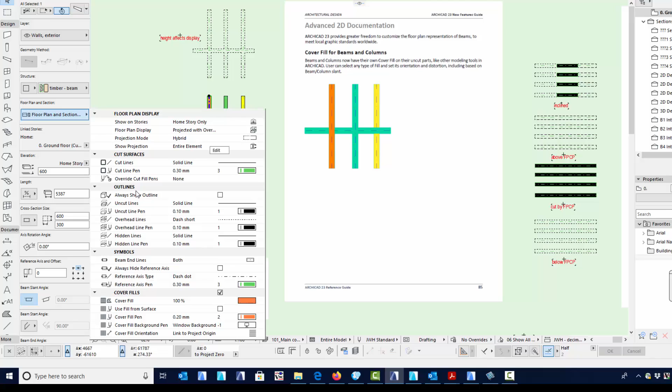The fill is adjustable, so if I select this beam here and go into the settings here, you can see there's a new section here for cover fill, and you can choose whichever fill type you like, whatever pen colours that you want, and they will blend automatically, as in if you look at these in 3D, this set of beams, all of these beams are at the same level, so they're all the same height, position, size in 3D, but each beam can have its own separate cover fills.

If the cover fills are the same, they blend together. If not, one will dominate the other, and that's simply controlled by the display order. So I can send this beam to the back and it will now be behind the green beam. So you can send beams forward and backwards if they're all the same level.

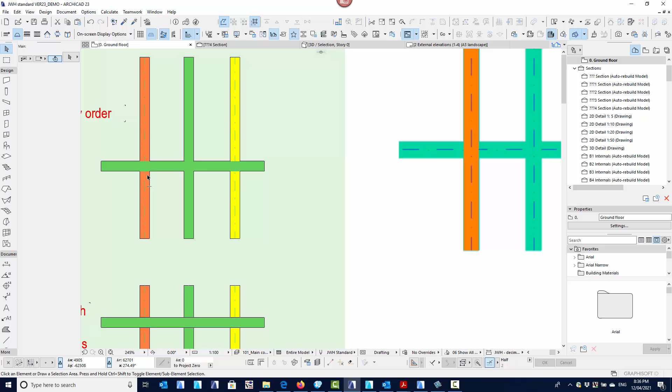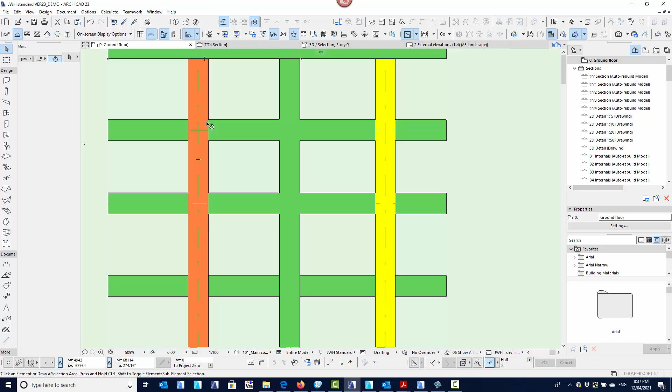If they're at different levels, like this one here, so this beam along the back here is above all of the other beams, this beam along the front is below all of the other beams, and then these ones in the middle are staggered half above, half below. You can see that if the beams don't touch, you'll get solid lines where the beams don't clash with each other. Where the beams actually do touch each other, the lines will be missing, but you won't see, for instance, like this beam here is above the other beam, you won't actually see that line, and the display order will not change the effect of that line.

So I can bring this forward in display order. It will now change the fill so that it's above this one, but there is no physical line there, unfortunately. The only time, as I say, you get a line is when the beams physically do not touch each other, and then you'll see that as soon as two beams touch each other in 3D, the edge lines, the contour lines will disappear, regardless of whether one beam is above the other or not. But you can still use display order to bring different fills forward.

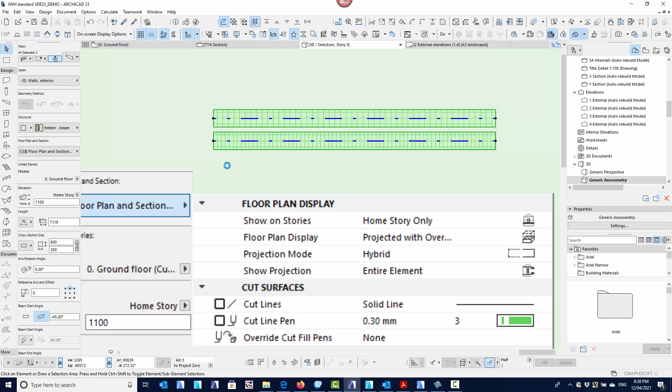Another thing you can do with the fill is they've got a section for the cover fill that's called 3D distortion. So in the case of this, I've got two beams, which if I can show you in 3D, one beam is horizontal, the other beam is sloping. So you can see exactly what's happening here. If you look at them from a top-down view, you'll see that it's got the same fill pattern on the top surface as this beam here, but because it's sloping, the fill pattern seems to be condensed.

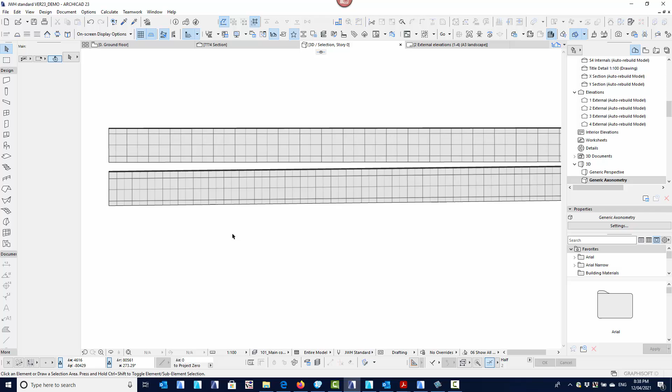And that's exactly what happens in plan when you use this 3D distortion. The fill pattern will basically be condensed. It distorts with the inclination of the beam. Not a big thing, just something that you might make use of when you're modelling beams. You now have the cover fill, which we never had before.

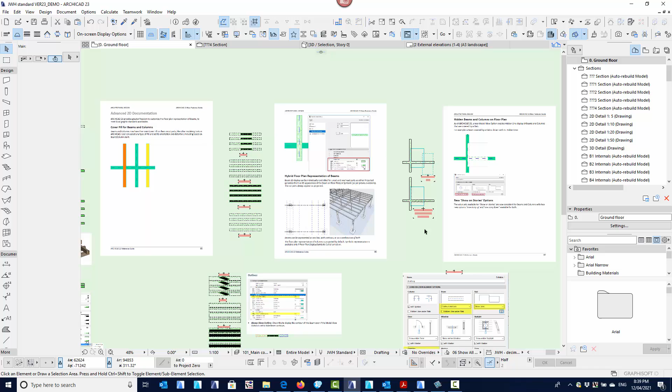Another thing you can do with beams is there's a new model view option. So if I go into model view options for the beam, the section for beams, so in the construction element options for the beams, we still have this, it used to be called entire beam before, it's now just called contour and axis. So we can have both the outside contour line and the axis line. We can have the axis line only, or we can have the contour line only. So you can see, as I flick through these, you'll see the difference in the beam. So contour lines, axis, or contour and axis.

There's a new option that says here hidden line under slab. So what that means is if this beam actually goes below a slab, it will become a hidden line. If I turn that off, you see it's just a regular beam, but as soon as I turn that on, if there's a slab above this beam, then the portion of the beam that is below the slab will become a hidden line type. And you can see that here.

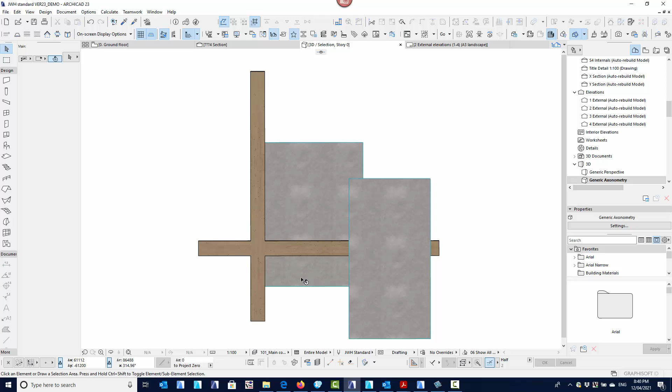Now, it doesn't affect slabs on different stories. So if you look at this here, if I show you this in 3D, I'll zoom to extents, what I've got here is a slab below the beams, a slab above the beam, but this slab is in the story above.

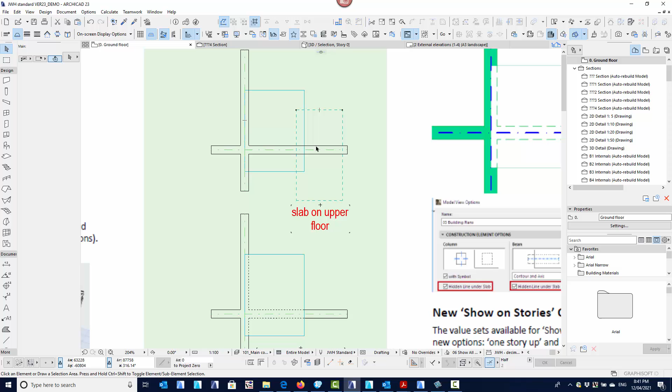So when I go to my floor plan, you can see that these beams are above this slab, so I expect to see the beams as solid, which I'm seeing here. This slab is above the beams, but you can see it's not affecting the beam lines because it's in a different story. Whereas

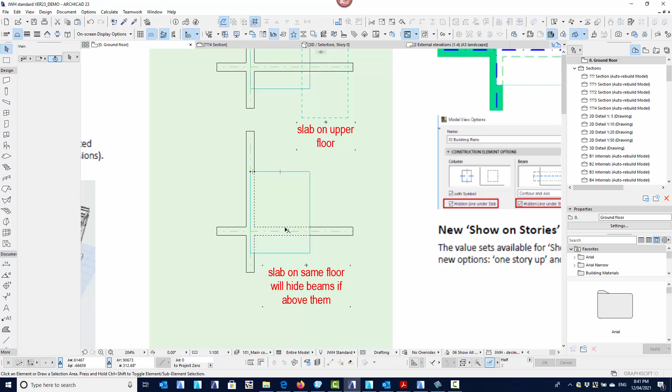if the slab is in the same story, so if I look at this in 3D, you can see that this slab is sitting above the two beams there. Because that's above the two beams and I've got that option turned on in the model view options, this part of the beam is now hidden.

And it's completely live, so if I move this slab across, you can see it automatically trims and hides. So it's completely live, but the trick is the slab and the beam have to be in the same story for that to work. There is a completely new tool called the opening tool.

It is quite similar to an empty door or window opening. It does basically the same thing. It cuts a hole in the wall. But the great thing about it is it can be associated to multiple elements at the same time. It can also be associated to different elements. So not only can we cut walls, but we can also cut beams, slabs, meshes.

It doesn't cut everything, so it won't cut a column, it won't cut a roof, and it won't cut a morph. But effectively, what it does is, as I say, similar to a door or window opening, in that we can assign an opening to an element and it can pass through multiple elements at the same time.

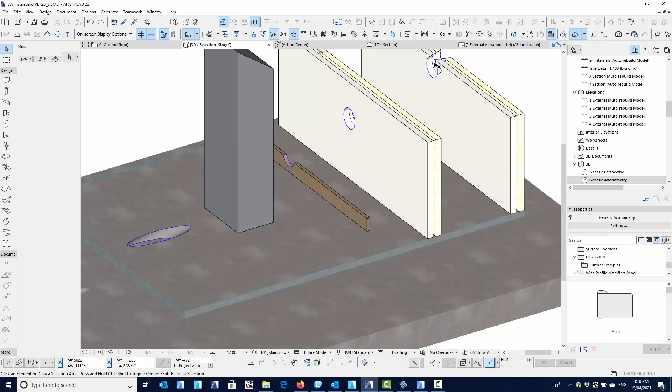So you can see here it's passing through this wall, going through this wall, cutting through the beam. It won't unfortunately cut a column, and it's then going through the slab and it's going through the mesh. There's an option up here in your on-screen display options to show the opening cutting bodies, and you can see an image of where that cutting body is. So it's a combination between an opening and a solid element operation.

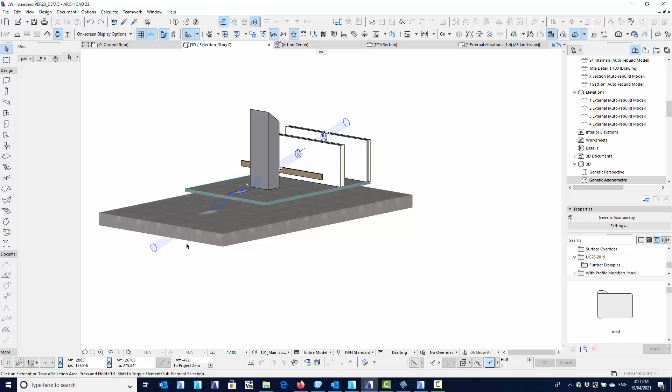So the opening belongs to one of these elements. In this case, I think it belongs to the slab, but I can then associate it to multiple elements that it will cut through. It can be repositioned, it can be rotated, it can be changed in size, and it will adjust accordingly if it's cutting something.

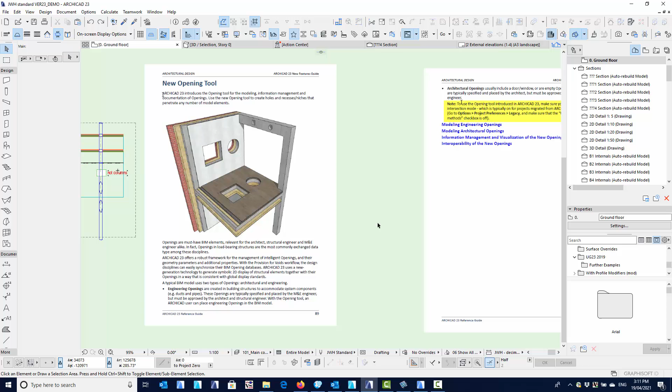It can only be round or rectangular, so you cannot have polygon shaped openings at this stage. Round or rectangular and oval, and you'll see some further settings as I explain it. I won't explain all the details of it, just go through it briefly, but that's the sort of thing that it can do. It can be a full opening through, it can be just a little niche, so you can actually control the depth of the opening as well as the size of it, so it's quite good.

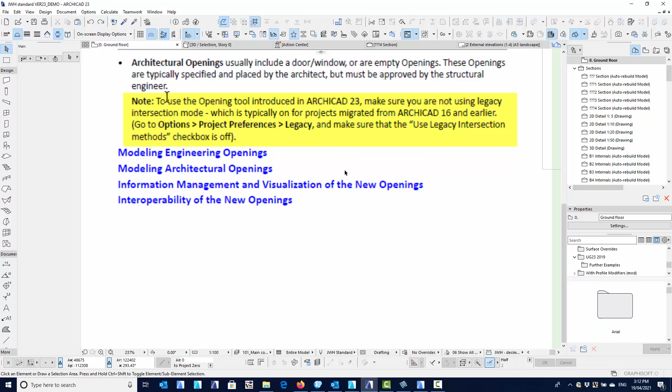The thing to watch is that, as it says here, make sure you're not using legacy mode, which we shouldn't be using any legacy modes, but any of the old jobs from pre-version 16, if they're set to use legacy options, the opening won't work at all because it's not designed to work in anything that's using legacy mode.

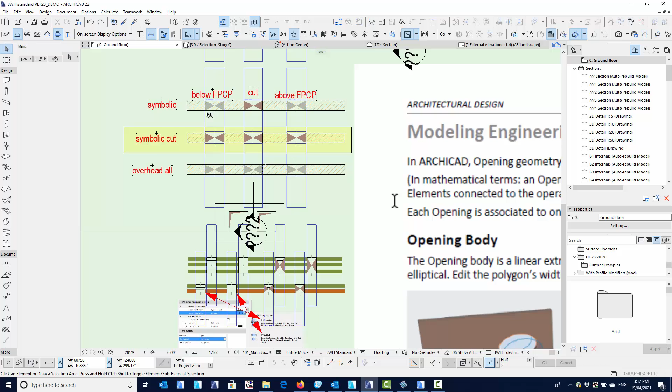Now, as I say, I won't go through all the details, but with the openings, it is possible to have a 2D display as well. So whether you're cutting a wall or a slab, it doesn't matter. Now this blue line here again is the opening extents, or as I say here, it's the opening cutting body, so you can turn that on or off to suit. It won't print, it's like a roof reference line if you like, it's invisible, so it doesn't print at all, but it just allows you to see it.

Effectively, when you select an opening, so if I choose one of these openings here, there's a few settings to just look out for. The first one is the orientation, so it can be perpendicular to the element, whether it be a slab or a wall; if it's an inclined wall, it will be perpendicular to that inclination of the wall. If it's a vertical wall, it will be perpendicular to the vertical inclination.

It can be a vertical opening, so no matter what element you put it in, it will be vertical, and it can also be horizontal, and it can also have a custom angle. I'll show you the effects of this in just a moment. As I say, it can only be rectangular or round.

There's your sizes, and like with other things, you can either lock the sizes to be proportional if you want to or not. This is the height above your story, and like with beams and columns, it has an anchor point, so you can choose whether you're positioning the center of the opening or the top edge, or you might want to align the very top left edge with something.

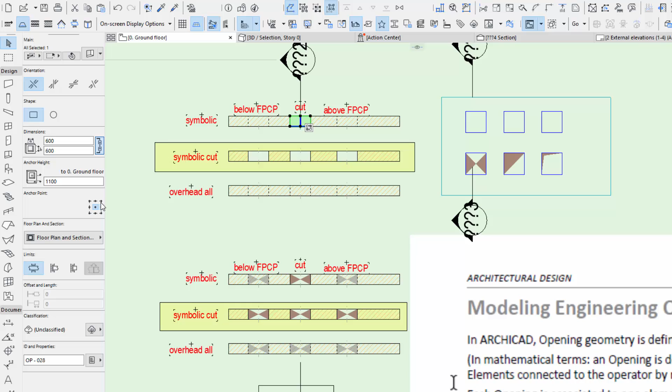So you can choose the anchor point that you want to use when positioning the opening. Your floor plan sections, this is where you control the pen colours and the line types that it has.

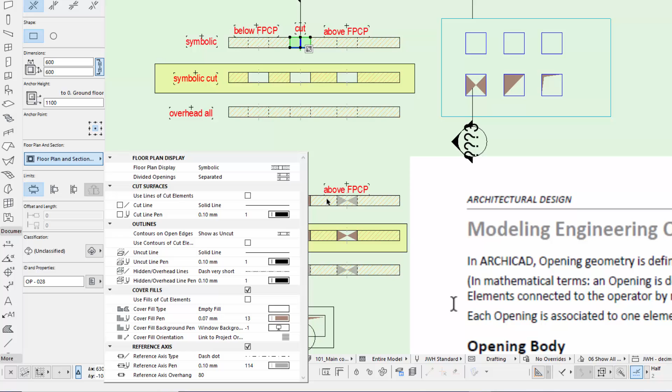We can also control a 2D symbol here, which you can't set through here, but if we go into the settings, there will be a section called 2D symbol, and we can choose to have any type of preset 2D image to represent that opening.

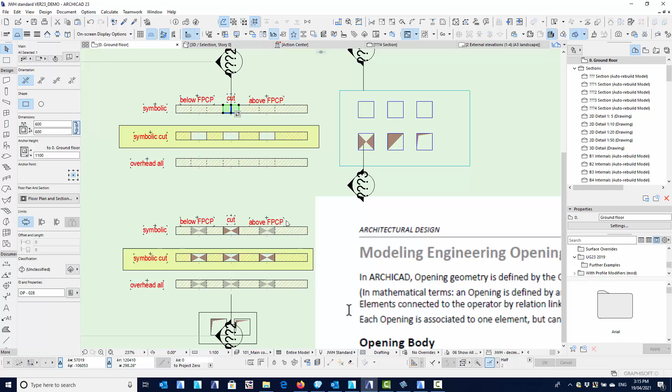So it can be an empty opening if you like, or we can actually place an image opening in it. So if I choose that one, for example, you can see now I've got that bow tie type symbol to represent it. So it can be what you like.

You can also have what they call an unlimited or infinite opening, which just means it continues on both sides. So even though when I turn the cutting bodies on, even though it's infinite, it's only showing it to a certain extent. It only shows about a metre beyond that element, but it is in fact infinite, going further out.

So if I was to attach it to this wall here, even though it doesn't go down to this wall, I can quite easily tell it to attach to this wall as well, which you'll see in just a moment how easy it is to do. And then the infinite opening will extend a metre beyond this wall as well.

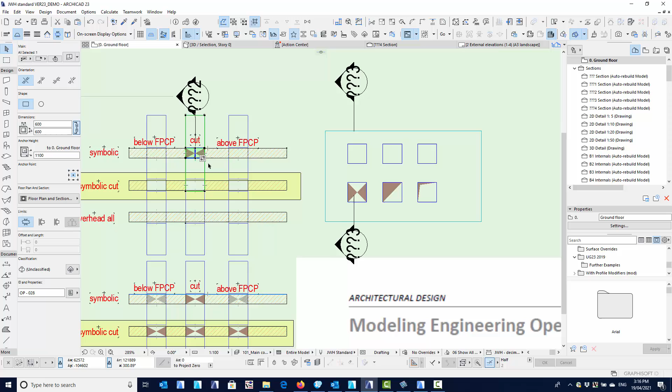But so you can have infinite, you can have what they call a limited one side, in which case is your niche, so it can just cut half the thickness of the wall if we want to. And it can also be limited both sides, which is basically like a double niche if you like, in the fact that it can be completely within an element and cut a void inside a slab or inside a wall.

So it has a length if you like, and you can position that central point inside a wall or inside a slab and have it cut just a void inside that opening, which we'll again see in a moment. And if you're choosing infinite lengths and stuff, that's where you set the lengths.

And this is all stretchy in plan as well, or in 3D as well. So you can set these infinite or semi-infinite lengths, and you can adjust the lengths to suit and quite easily control it. And it's possible to also flip the length.

So when you've got a single limited depth opening, you can also flip it so that it effectively will work the other way around and cut the niche on the other side.

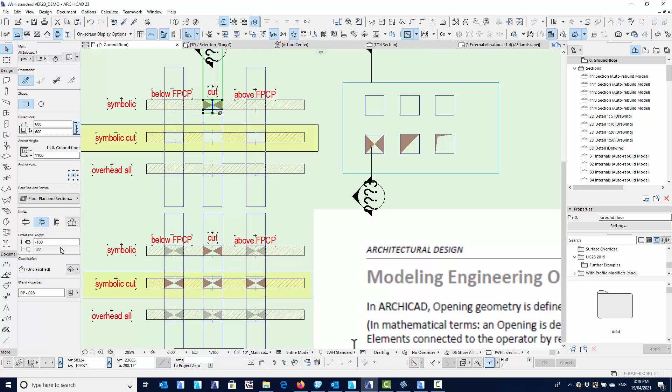Here's a simple example. I've got some slabs here, and an opening, but I'll just go and get a new opening, which happens to be square 600 by 600. And if I just place that there, for example, I've placed it on that slab and it knows it's actually the top slab there that it will associate to.

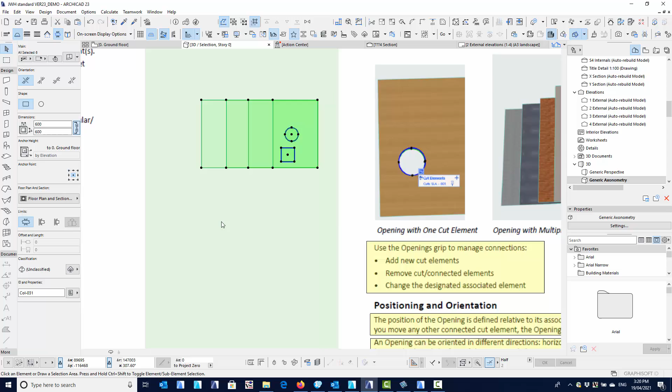So if we look at this in 3D, you can see exactly that's what it's done, it's gone into that slab. So it's an infinite depth opening at the moment, but as I say, it only shows down a metre, but it is infinite, and at the moment it can only associate to that one element because that's what I clicked on in plan.

I can just as easily place an opening in 3D, and you can see here, depending which slab that I choose, it will actually lock to that particular slab. So you can see here that it's associated to that slab.

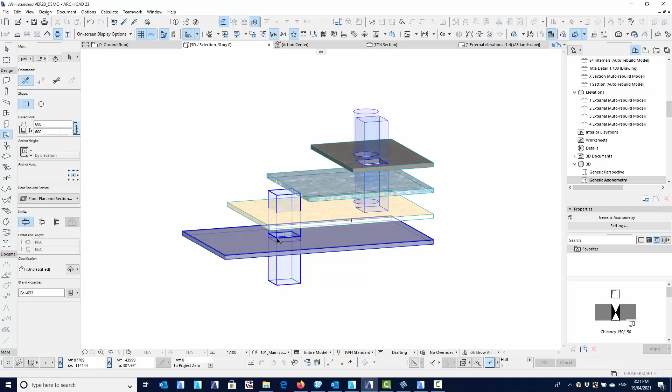It's infinite again, but it's at the moment not cutting that slab because it can only cut one element at a time. But it's very easy to select that opening, and this is where the solid element operation part of it comes in. You have this grip, they call it, and it's telling me that this is cutting this slab, ID number 18. It's pinned to that slab, so it actually belongs to that slab.

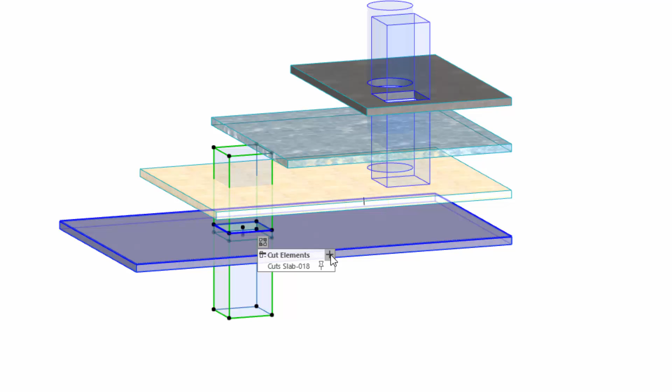I can hit the cross button here, the delete, and it will delete it completely, or I can press the add button and say I want to add this slab. So all I've got to do is highlight that slab and add it, and you can see exactly that's what it's done - it's now added that slab as a whole. Again, I can just say add, and then go to the next slab and add that slab. I can add this slab in as well, but obviously it's not cutting anything, so nothing will happen.

I can select this hole here, and go to the same grip and say add. I don't want this one, I don't want this one, but I do want that one. So you can see you don't have to have consecutive slabs, walls, whatever - the hole can miss some and go through others. So it's what you want to associate it to.

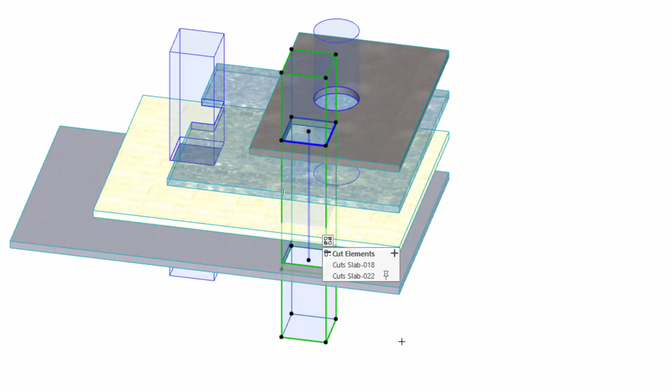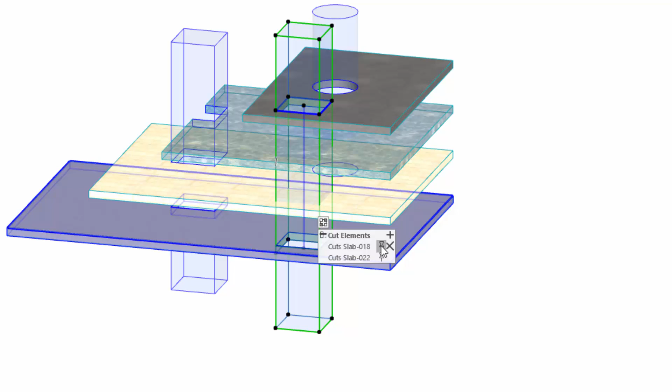I can see that it's pinned to that slab, and as I highlight that you can see the slab highlights. As I put my mouse on this entry here, the slab will highlight to show that it's there, and the pin means that it's pinned to that slab. I can also swap it, if I want, and pin it to the other slab. It can only belong to one element at a time, and you can see the bold outline, so it's now associated to this slab.

And what that means is if I move this slab, just across a little bit, the openings associated to that slab also move. Because the opening is associated to this slab, whatever I do to this slab will affect the opening. So if I move the slab, it will move. If I delete the slab, it will delete the opening.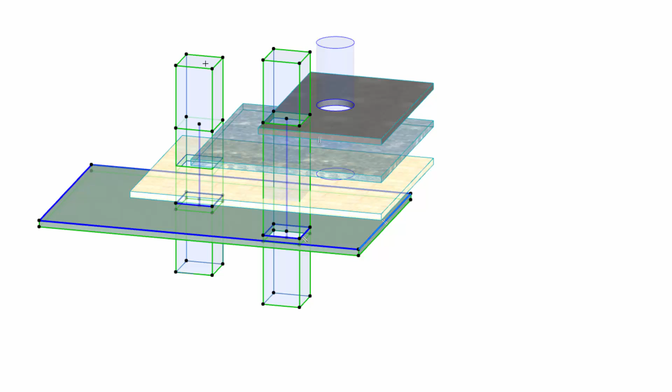However, if I was to move one of these slabs, for example this one, the opening doesn't change at all because it's associated to the other slab down here, and its position won't alter - it still cuts. I can physically move this slab away and it's still cutting this slab. So it remembers the connection, but there's just nothing actually happening at the moment - it's like a solid element operation. They've got to be in the same proximity as each other for the actual cutting to occur.

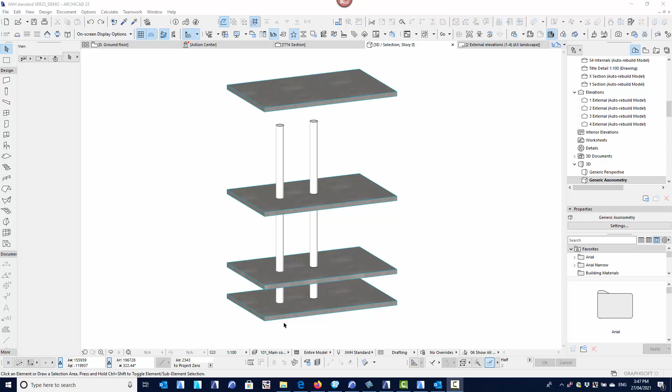Just so you're aware, it is possible to create an opening that passes through multiple elements at one time, rather than having to place an opening in one element and then associate it to other elements. All you need to do is place an element that represents where the opening is that you want it to be. In this case, I've got a morph that I've placed in here - all I did actually was place a simple column, but you need to be a little careful with things like columns and walls because they automatically trim.

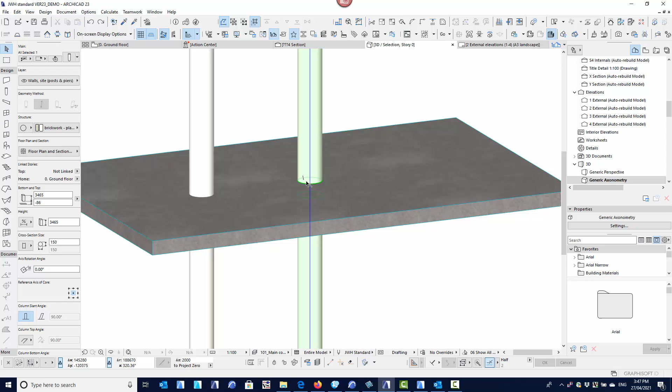And if you look here, you can see that the slab is automatically trimming away the column. Therefore, there is no intersection, and therefore the option that I'm about to show you for creating the hole isn't going to work because there's no column actually physically passing through that slab. It is, but it's being trimmed away by the slab, so it won't create an opening.

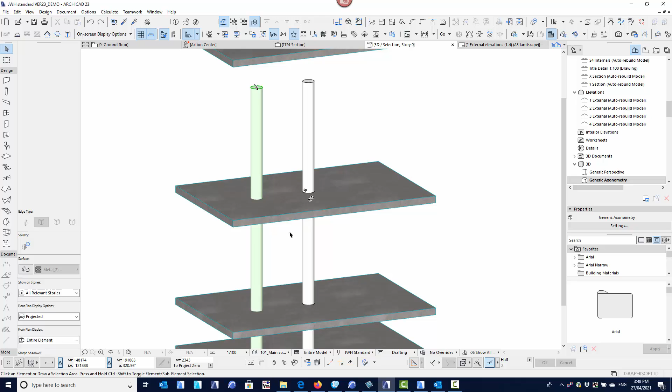So the trick is to use a column and then simply convert it to a morph. The morph doesn't have that same automatic trimming. If I turn the floor slab layer off, you'll see exactly what I mean, in that the column is being cut by the floor - that's what I mean. The column will no longer have an intersection when I go to create the opening. So all you need to do is place your element and ideally convert it to a morph that doesn't have any of this automatic trimming.

Then all you have to do is right click and choose the connect option and say create openings from selection. That'll bring up a dialog box where you can choose an automatic shaped hole - so if this is round, it will create a round hole; if it was rectangular, it will create a rectangular hole. I can force it to be rectangular or round. In this case, I'm just going to say rectangular. I can provide an offset around that element, so it will create an offset of 100 mils. I can choose to keep the original elements, or delete the original elements, in which case the morph will delete, leaving just the holes.

I'll leave it just for now, so you can see exactly what happens with merging nearby openings. This is the distance between openings, which I've got set to 1 meter. These slabs are closer than 1 meter, this slab is more than 1 meter, and this slab is not connected at all. So you'll see exactly what happens: the ones closer than 1 meter will merge into one opening, this will create a separate opening, and this won't create an opening at all.

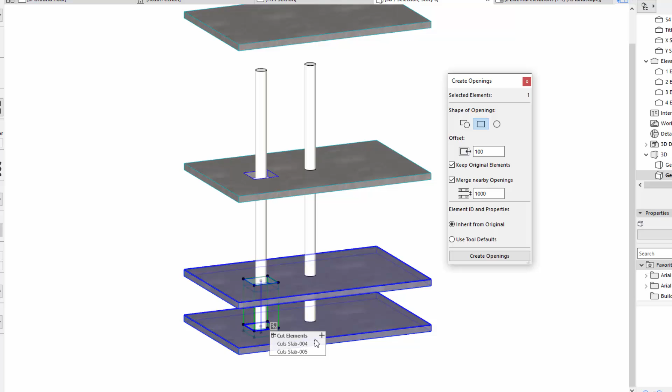If I select this one, you can see both are selecting at the same time. In fact, the opening belongs to this slab and this one is just automatically associated, which I've shown you before. So it's pinned to this slab and associated to that slab. But this opening, because they are further than 1 meter apart, they won't merge. All I've got to do is create a larger figure there and they would have merged. And obviously there's nothing connecting here, so there's no opening.

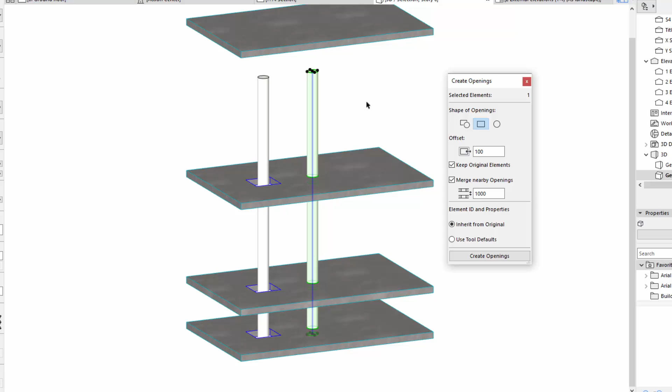Just as an example, if I show you the same thing with the column that has this automatic trimming happening here, if I use exactly the same settings and create an opening, no matter how many times I click it, nothing will happen because there's automatically a trim there between the slab and the column. There's physically no column there now to cut the slab away.

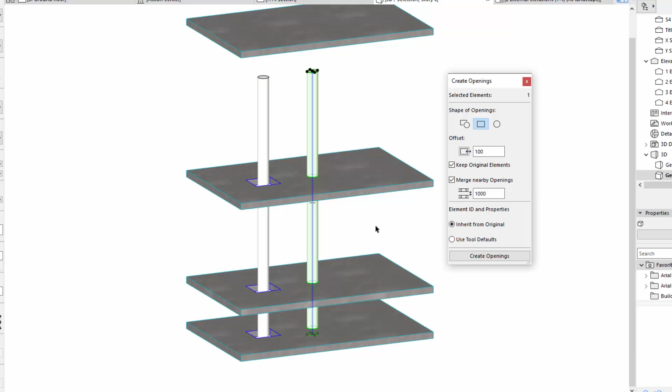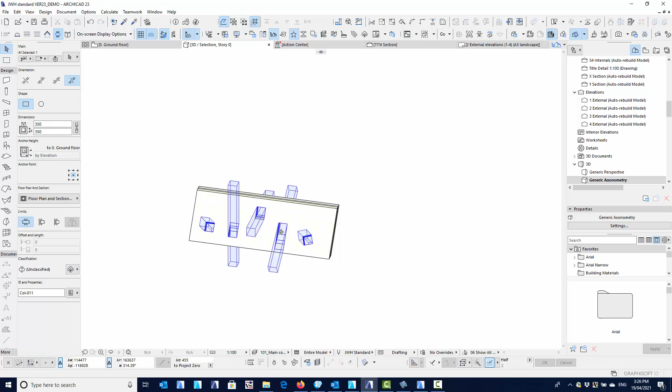This one is vertical, we can see here that's a vertical opening. This one here is horizontal. These two at the end here are custom. This one at the end is not only custom, but it's also been rotated around its axis as well.

So if we look at any of these, you can change them at any time. So this one, as I say, is vertical. I can change that to horizontal. I can take the horizontal one and I can change it to perpendicular.

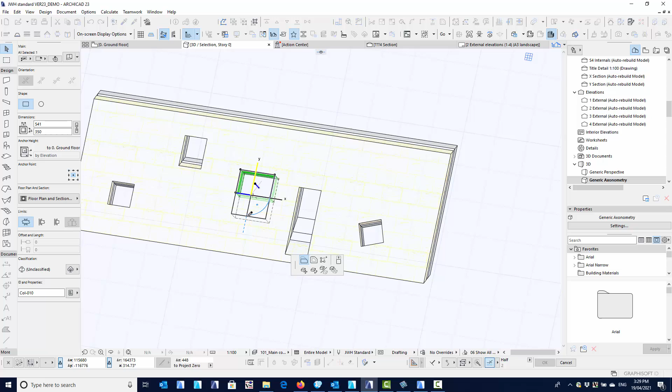As I mentioned before, the openings can be resized. It's simply a case of stretching. You can stretch an individual side if you like, or you can stretch the entire polygon, bigger or smaller. It cannot be a polygon, so we can't curve these edges or chamfer corners or anything like that. It's got to be a rectangle or an ellipse or circular shape.

As I mentioned before, it's very easy to adjust the depth of an opening to create a niche. If I create an opening in this wall, you can see that at the moment I have it as an infinite opening. If I select that, you can see it's set to unlimited or infinite. To adjust this, I can change to a semi-infinite, or a limited one side, or a limited both sides opening, and then I can play with the figures here, or I can simply leave it as an infinite opening and just adjust the length of the axis line.

Now if I adjust the front axis line here, I'm controlling the front surface of this opening, and if I adjust the other end of the opening, you'll see that what it does is it creates a niche, and it's literally pulling the back surface of the opening in. Automatically it will switch to a limited one side opening and will adjust the figure to suit.

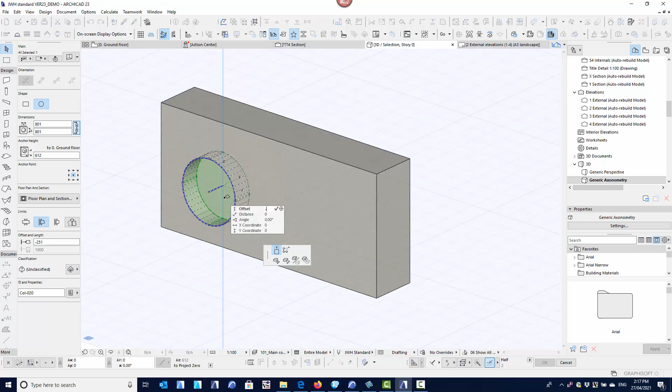As I'm stretching this, I can type in the figure that I want. So if I want exactly minus 250, I just simply type in minus 250, and that creates the niche for me. At any time I can swap back to an infinite opening. If I stretch this side here, again I can type in an exact figure if I want, but I'm affecting the front surface of that.

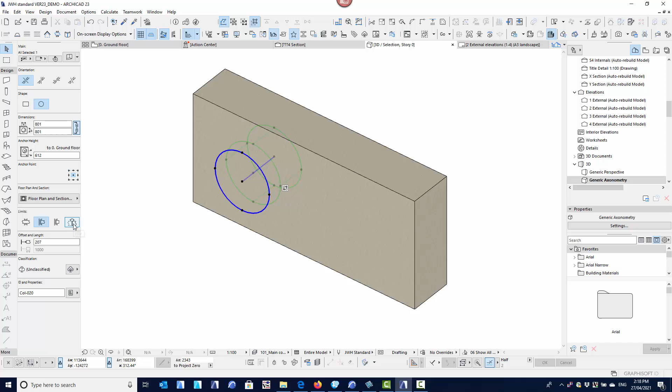Now once you have a limited one side or a limited both sides, this is where the flip can come into play. If I was to flip that opening, what will happen is the reference plane of that opening will stay exactly as it is, and the opening depth that I've just stretched will flip. So as I say, the reference plane stays there, and you can see now the opening depth has gone there.

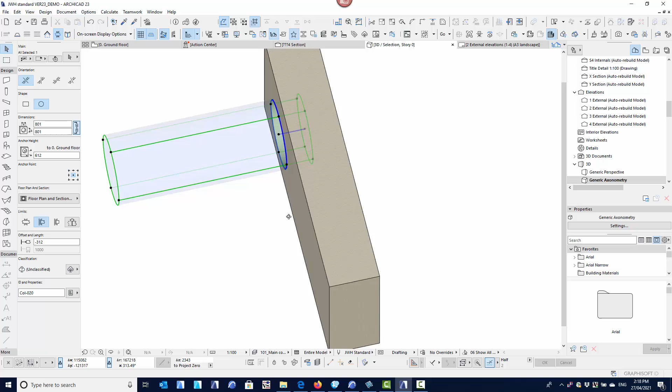If I turn on the cutting bodies, you can see exactly what's happening now is the opening is physically still attached to the wall with the reference plane, but my opening depth is now going outside of the wall rather than inside because I've flipped it from that side to this side. I can simply stretch this back, and it's this one here that I'm wanting to change, so all I have to do is stretch that back into the wall, and you can see I've recreated the opening. So it's quite easy to control visually, or you can set actual figures in here.

Remember too that you can also have openings that are vertical. So if I force this opening to become vertical, I can attach it again to this wall here. Because I've placed it as an infinite opening, I can simply select that opening and pull in both ends, adjust the heights. So I now have a limited both sides niche, and I've now created this nice little curved alcove in the wall. So it's very easy to control the depth and size of the openings.

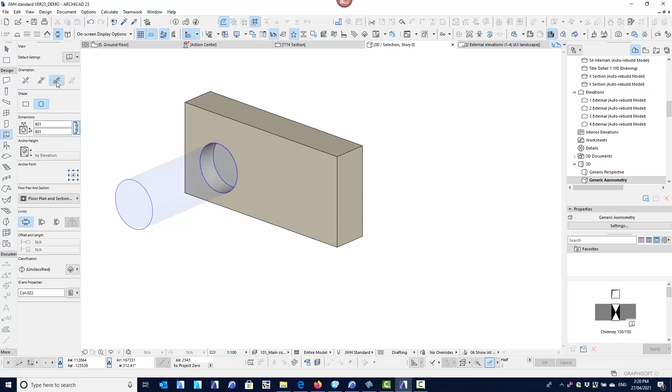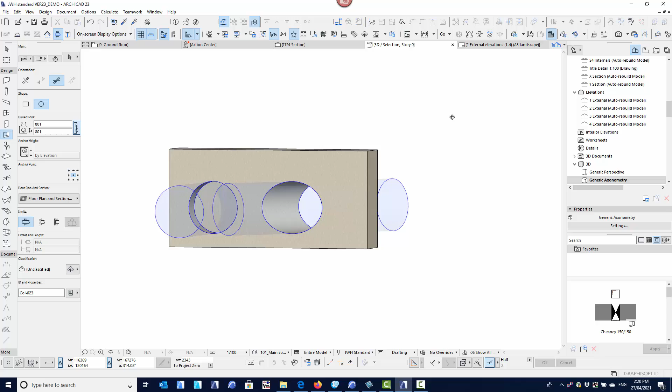Just one thing out of interest, when you do place an opening, the first one that I placed was the aligned or the perpendicular to the surface. If I was to place a horizontal on this surface of the wall, it's going to ask me two things. One is where was the original click, and then I can place it horizontal, so you can see if I look from the top view, I can actually spin this around in any direction that I want. So it's still horizontal, it just may be at an angle. So I can create a tube like that. So you can actually align the axis. So the first point you pick is the reference plane. The second point is the axis of the tube or the cutting body.

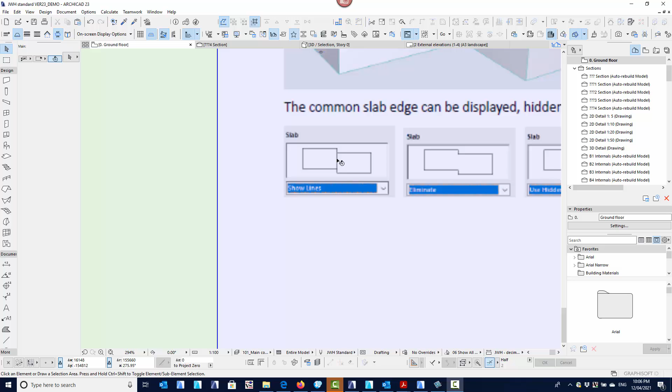Some other minor new features. One is that there's a model view option for hiding the edge lines of slabs. So we can now choose to either always have a line, eliminate the lines, or show them as hidden lines. I'll show you a little bit more clearly in the actual model view options.

So now with slabs, we can either show the line, and when you have two adjoining slabs, even if they're exactly the same height, exactly the same material, there'll always be a line. You can choose to eliminate that line. So if they're the same height, same material, the line will be eliminated, or you can show it as a hidden line.

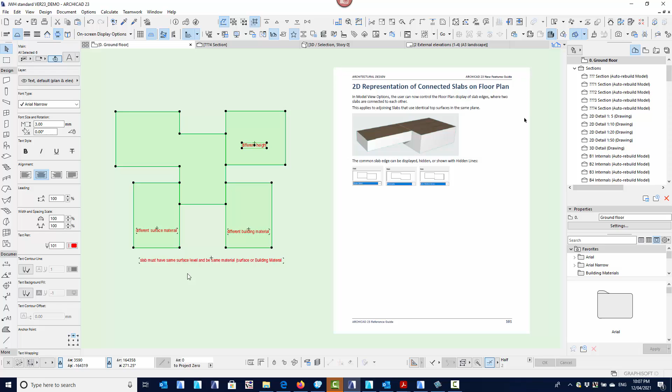So if I set that to eliminate all lines, you can see what's happening here. I have a bunch of slabs. These are all separate slabs, so this is actually a separate slab, that's a separate slab, etc. So they're all 5 separate slabs. Have a look at them in 3D and you'll see what is happening here. So there's a separate slab there, it's exactly the same height as that slab, so they're all the same heights except for this slab over here, which is a different height. So it's still touching, but you can see a slightly different height there.

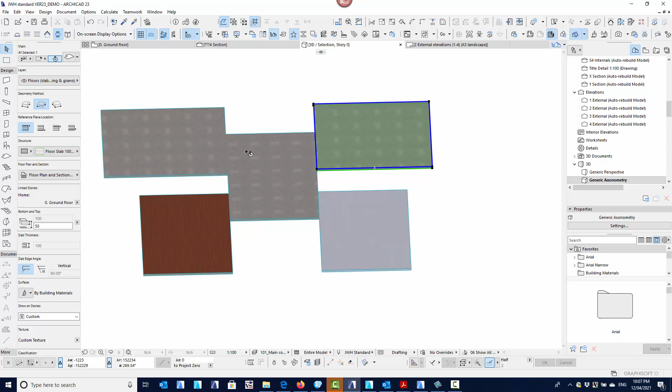So same material, same height, same material, different height, and then different materials at the front here. And you can see what happens here is that that line has literally been eliminated. So again, it's just a model view option. So I can say eliminate the line, show all the lines, which is what we used to have. It will always show the line there. And if I can find my model view options again, we can say show it as a hidden line. So you can choose how you want it to display.

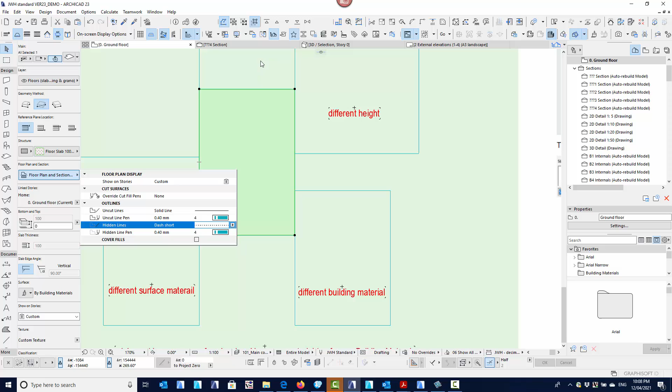But my hidden lines are set as dash short. So you have to have the hidden line for both set the same. I obviously didn't have my hidden line set, so in here you've got the section for outlines, hidden lines. If they're both set to dash lines, that's exactly what you'll see.

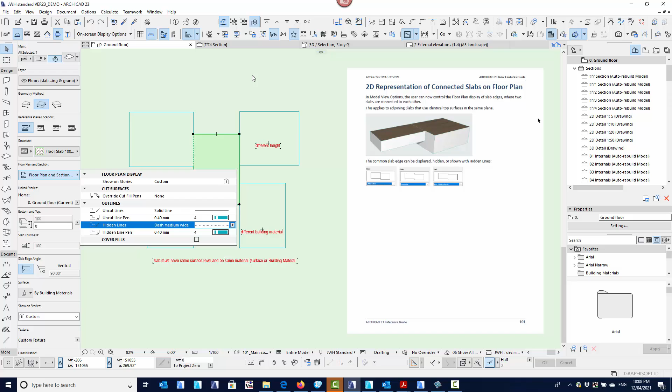If you have one set for a dashed line and one set for a slightly different line, let's see what happens. So if one is dashed medium, one will override the other. I'm not sure if display order will affect that. Yes, so display order will affect that as well. So whichever slab you bring to the front, that's the hidden line that you will see.

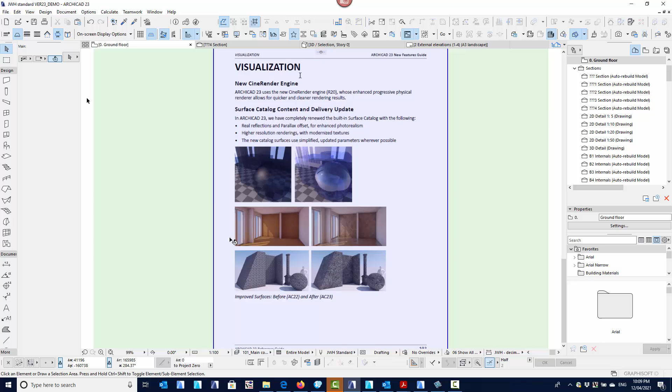Visualization: the CineRender engine has been updated a little bit. It has some slightly better materials, so you can see the quality of the concrete material before and after, and the polished floorboards and things like that. Glass, the materials are much better. These are all now in the template in our catalogue, so they should be better than they were before.

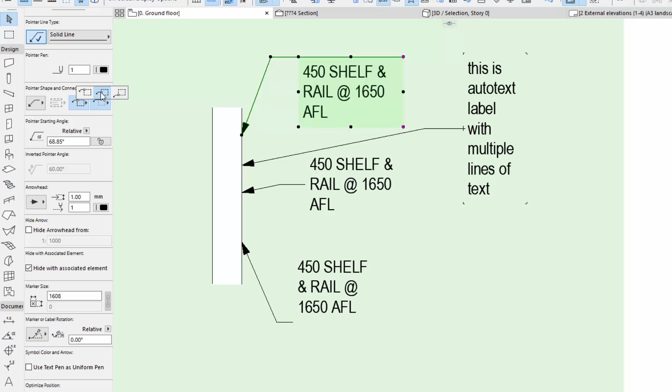I can change that to the center, and it will have a continuous line through the center, which makes no sense in this particular case with 3 lines of text. But with 2 lines of text, it would simply go right through the middle. And we can also change that to the bottom, so it can have the continuous line across the bottom, which is something we couldn't do before. I think we had the bottom option. We didn't have the other two.

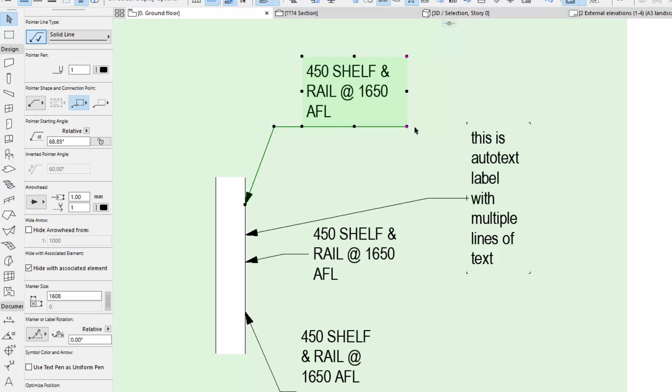Also, this is an object label, but if you're using auto text, it now has a new option as well. You still have the top, middle, bottom, and you can extend the line through. But with auto text we also have some anchors where we can lock to, in this case, the text box according to top, center, bottom, or we can lock to the top line. And if we lock to the top line, we can then say whether we're locking to the top of the top line. So you can see here it's not the top of the box, it's the top line of text.

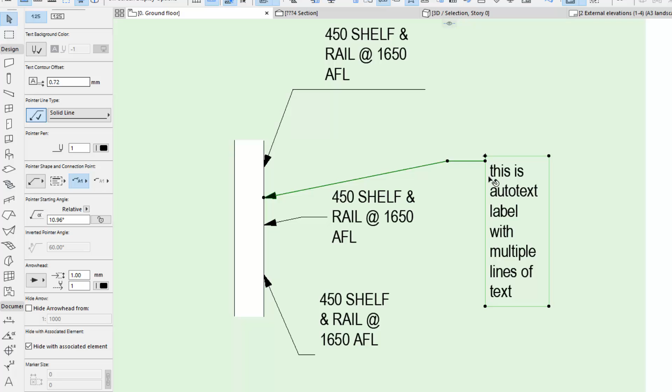We can lock to the middle of that line of text, or the bottom of that line of text. And we can also do the same for the bottom line of text. So again, we can lock to the top, the center, or the bottom of that line of text, depending on what we want to do. And that extends the line through. So that's the same as before, we can extend the line through.

It's not available, as you can see here. If I say the center of the text, it will go through the top of the text, it just won't go through the center of the text, because it knows you wouldn't want the line through the text. Whereas with this one here, it doesn't know whether you're doing 2 lines or 3 lines. So if I was connecting to the center, it doesn't recognize how many lines of text there are, it will just put the line through.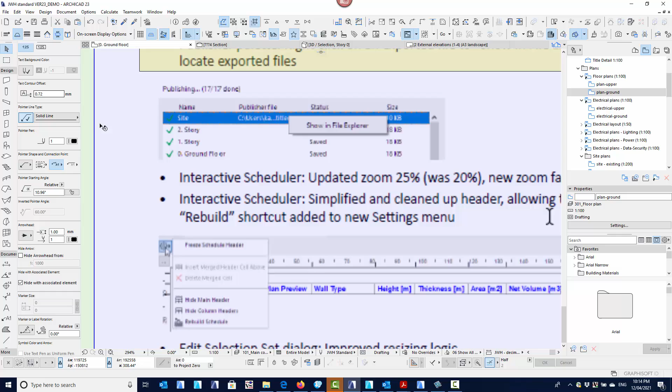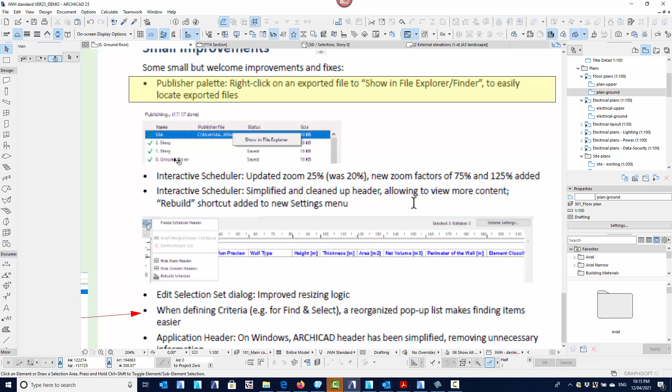The publisher palette has an option where you can now right click. When you publish a file, you get this list of files that it's published, and it comes up saying saved. You can now right click on any of these and say Show in File Explorer, and it will literally open up the File Explorer and show you that file. Again, sorry for the quality of this. This is just a screen grab that I've pasted into ArchiCAD, and it wasn't very good quality.

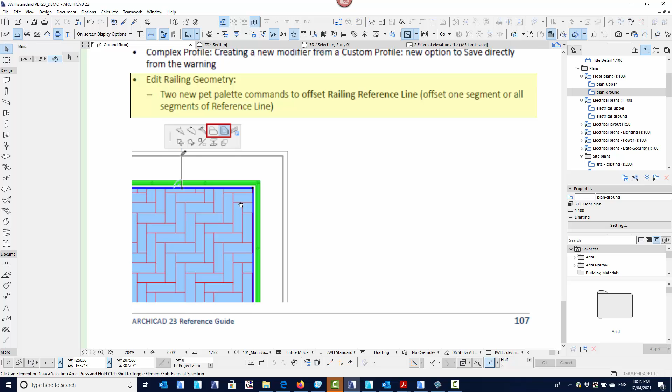Railing geometry: if you're playing with railings, it now has 2 new offset options. One is to offset just a single side, or, as with a polygon, we can offset all sides, so all the sides of the railing will offset at the same time.

This one here, list of complex profiles: fixed an error in Windows where the profile names were truncated. Whenever you looked at a list of complex profiles, it got to a certain number of characters and then just cut it off. What you'll find now is when we look at the complex profiles list, the name is now infinite. If the name got longer, it would show a wider box here. So they're no longer truncated, which is nice.

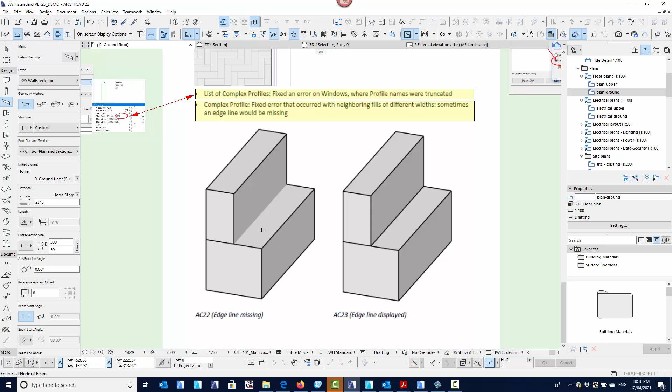If you had complex profiles before and 2 parts of the complex profile were the same material, quite often you would end up with no joining line there, because it would think it has to blend the surfaces, and it doesn't show the joining line.

It will now show a joining line. Composites dialog box duplicate functionality has now been merged. So whereas before, if you've got this wall type, this composite, and you wanted to duplicate it, it used to have a separate duplicate button. It's now hidden into the new, so you say new, and then you can choose to duplicate or not. So completely new, or you can duplicate the existing settings.

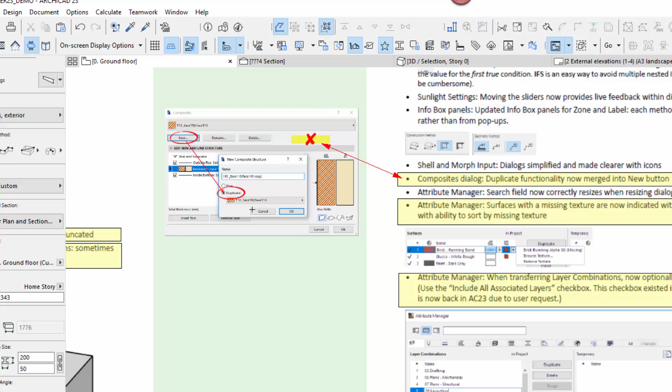The attribute manager, surfaces with missing textures are now indicated with a red texture icon. So in the attribute manager, if you do have a surface and it has a missing texture, the icon will be red. So you'll see that, and it will actually say that it's missing in brackets there. Shouldn't happen very often, but it makes it easier for you to spot any problems now.

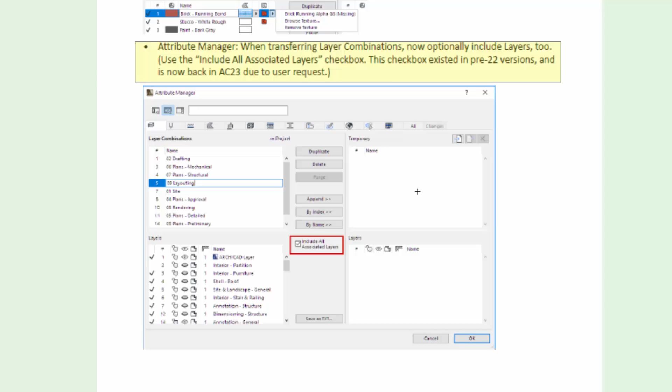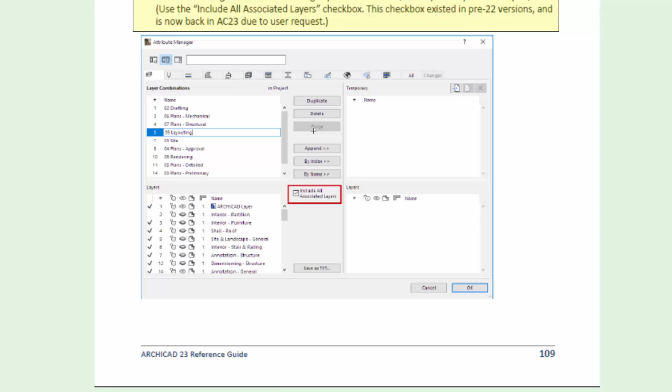The attribute manager, when you're transferring layer combinations, it now has the ability back where we can include all the layers. So we've got the layer combinations here. We can transfer the layer combinations from one job into another file, or from another file back into this file. Before version 22, we used to be able to include all associated layers. For some reason, this option disappeared in version 22. It's back again. So when you do the layer combinations, you can automatically include the layers that are included in those combinations, rather than having to select them separately.

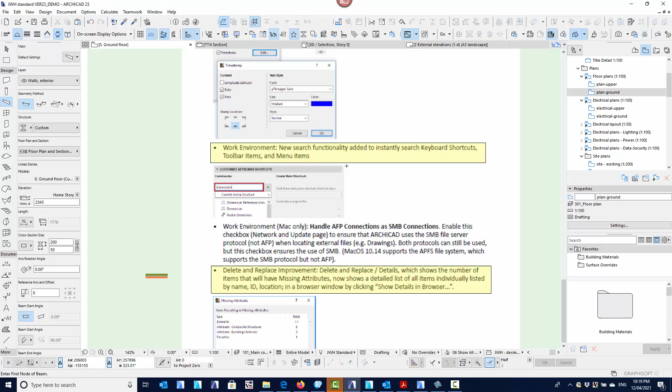The work environment has a new search function added to it, so that when you're looking for things in the work environment, you can actually just go into the search. Probably not a big thing because you're probably not customizing the work environment very often, but if you are, you can just add a search in there and it will go and find the menu or the keyboard shortcut automatically for you. It'll give you a list of things that match that text.

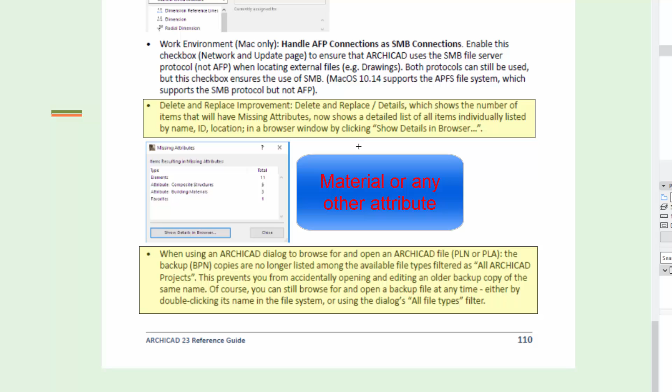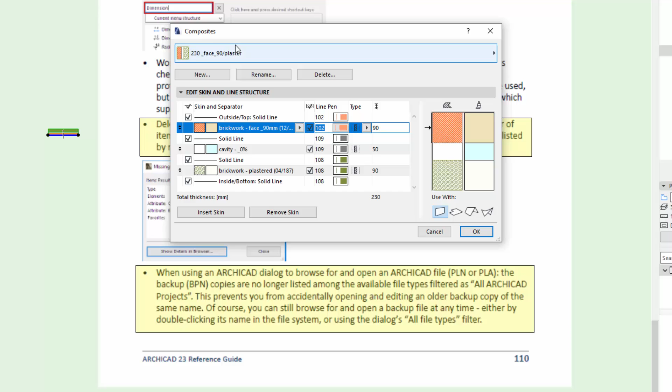The delete and replace improvements: when you delete or replace a material, if it was going to result in missing attributes, it would give you a warning, which it used to before, but now we can actually go and get more details. There's a button here that says show details in browser. So for example, I've got this wall here. If I just go into the edit selected composites, that's the wall that I've got selected there. If I was to delete it, you can see it's going to result in missing attributes because I'm deleting this composite. So this wall will still be there, but it will be missing the composite.

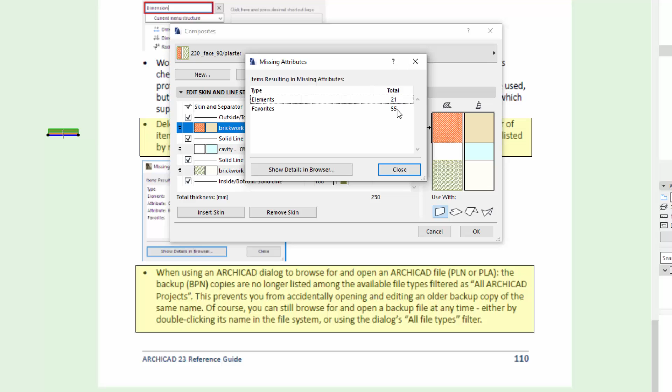So now I can go into my details, which we could do before, but now I can actually say show the details in the browser. So you can see 21 elements are going to be missing and 55 favorites are going to be affected. It will open the browser up and it will literally list all of the elements. So it's giving me the element type, the ID, and where it was placed. So you get a bit more information about what is going to be affected rather than just a message. I don't want to actually do that, so I'll cancel that.

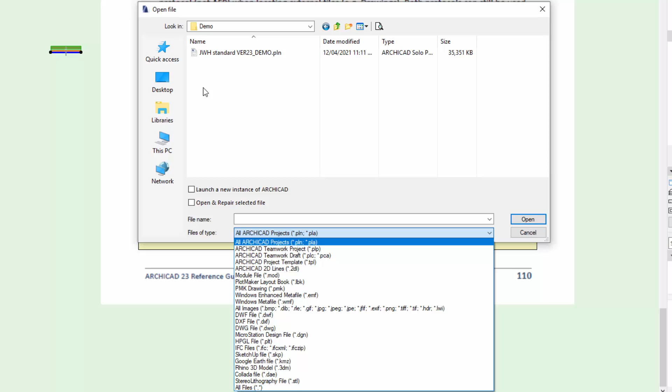And when you're using the ArchiCAD dialog box to open a file, so if I go file open, it will only show you the proper file types, the PLNs or PLAs. It will no longer show you backup plans. So when I go browsing into my demo folder, you can see it's got the PLN. It will not give me the backup plan. No matter what I do, it doesn't have an option in here for backup plans at all. So you can't accidentally open the backup, which was something that did happen from time to time.

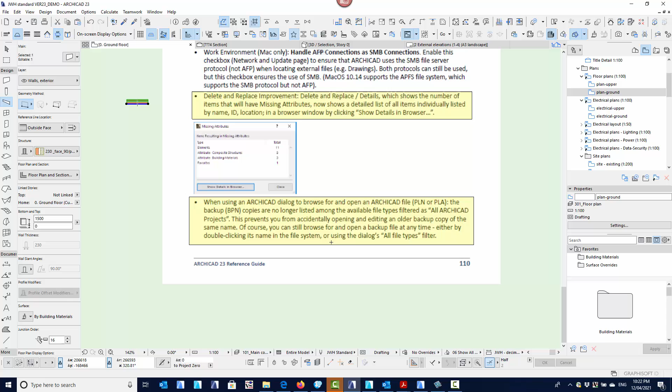Well, I say you can't accidentally, you can't do it from here, but you can go into your file manager and find your folder. So if I look for that same demo folder, there's my PLN, there's my BPN. I can right click and open that BPN, the backup file, and it will start a new ArchiCAD and open that file up. So that's the new features for 23. I'll do a separate video for the new features of 24.